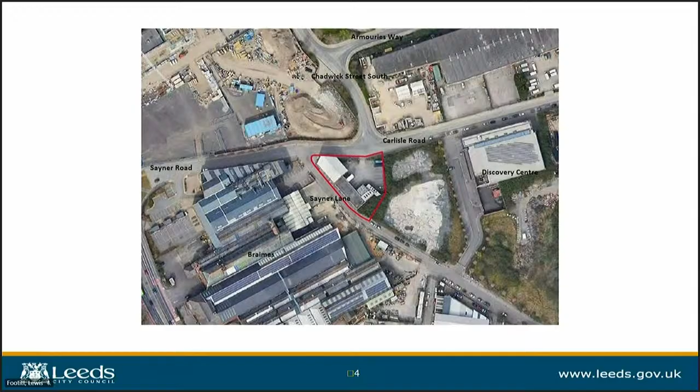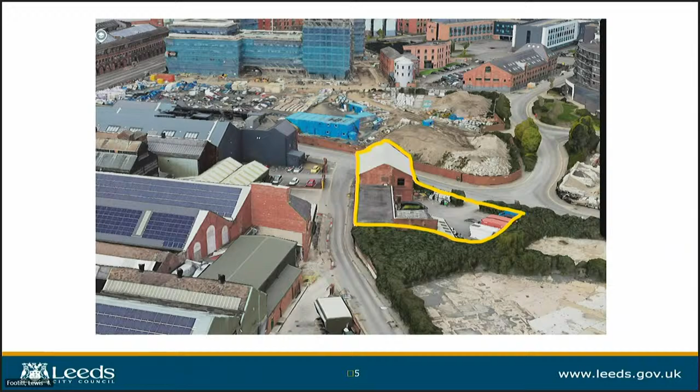And you can also see across Sayner Road there's the Points Cross development by the Guinness Trust. And immediately across Sayner Road, just here, there's permission for a 20-storey residential block. So the existing building comprises a 2-storey element at the apex of Sayner Lane and Carlisle Road.

And there's a single-storey element that's facing Sayner Lane, and there's a yard to the rear. I think you'll agree that the buildings are lacking in architectural merit and are unexceptional in visual terms.

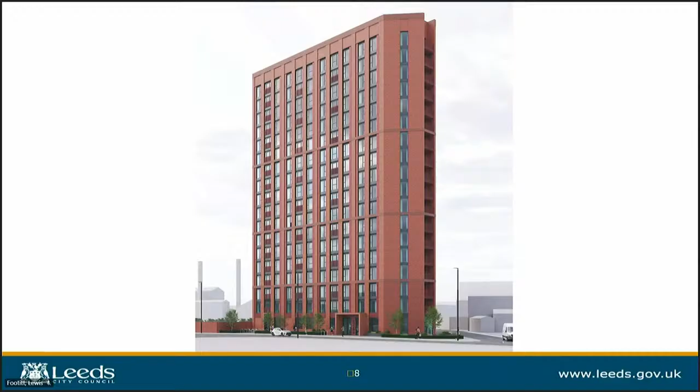So the proposal is to demolish all the buildings on site and erect an 18-storey building of 164 flats. The design team has worked with the developer to achieve a satisfactory facade. The building would be top and tailed with a distinctive crown and plinth.

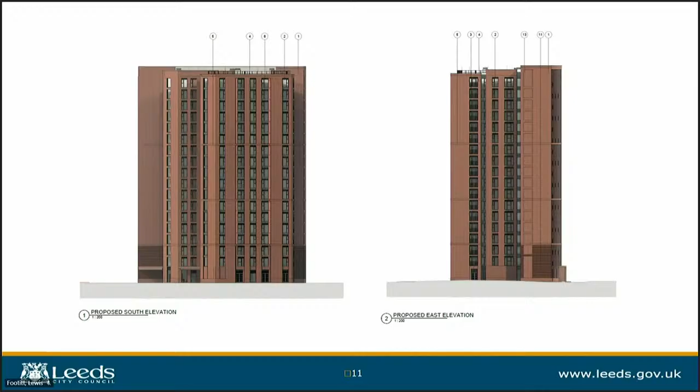The crown has these arched insets at the top there, and the plinth is defined with a different textured brick for the first 3 floors.

And the main part of the elevation has aligned windows, giving a strong vertical emphasis to the facade. And the windows would be set into deep 240mm reveals against the brick framing. And there'll be a variety of panelling and Juliet balconies to provide visual interest. On this slide, you can see the textured brickwork that helps define the plinth.

And this slide shows the south and east elevations. I'll just draw your attention to this bit of the building here, where there were going to be a line of windows, but they've been removed in case the site next door is developed in the future, so it wouldn't be at all stymied.

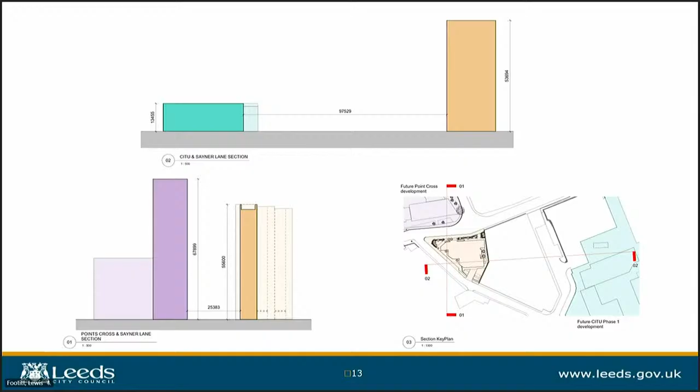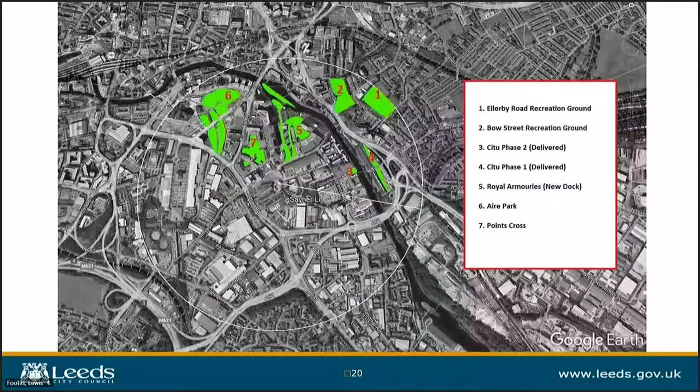In terms of biodiversity net gain, the planning application predated the go-live date for the national scheme, but nonetheless the scheme does demonstrate a 25% improvement in biodiversity. There isn't really very much biodiversity at all on the site at the moment, as it's mainly buildings and a tarmac yard.

In terms of wind mitigation, this includes the framing to the surround to the main entrance there. There's also landscaping here so people can't walk past the corner, and there's also a 1.8 metre fence that runs along the outside of the south and east of the site. And for design reasons, we had suggested a dwarf brick wall with a fence above, at least around the street frontage. But the developer has said that there are structural reasons why this cannot be done.

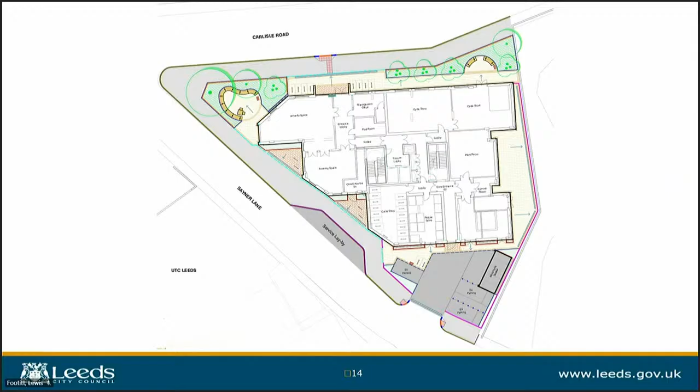In terms of accessible dwellings, there'll be 59 of the M4(2) type dwellings. That's 36%, and there would be 4 M4(3) dwellings, 2.4%. Both those percentages exceed the requirements in the policy.

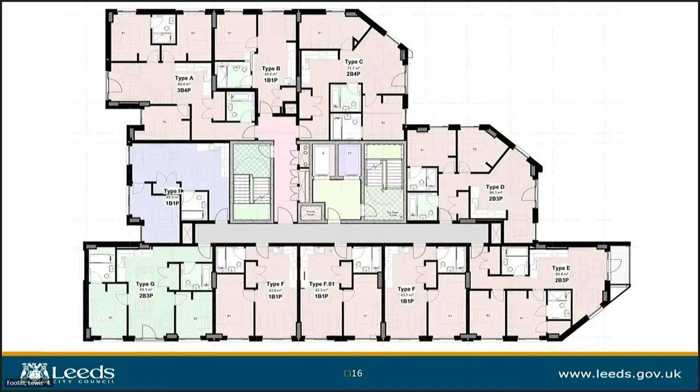So altogether, we feel that whilst the scheme doesn't provide affordable housing and doesn't provide the full green space financial contribution, it will regenerate a brownfield site and provide 164 new dwellings in a sustainable location. And also all the other policy requirements are met. So it's considered that the scheme should be supported. Thank you.

Okay, thank you. Can I now invite Ashley Wheat to the table, who is speaking in objection to the application, please? Okay, once you're ready, you will have 4 minutes to present your case. Whenever you're ready, yes. Thank you.

I appreciate some of the points I'm going to make have already been mentioned in the presentation, but I thought I'd raise them anyway. So I'm a resident, along with Jonathan, here on Central Place, which is, I think, the nearest neighbouring existing residential development, part of the Citu Climate Innovation District. I've got 4 main points to raise, really.

First being the parking. So the proposal outlays 3 parking spaces, including 2 accessible parking spaces. Living in the local area, I can tell you that parking is already a massive problem on street parking, and I do think it's unreasonable to assume that the occupiers of 164 dwellings aren't going to come with any cars. There's already a lot of pressure.

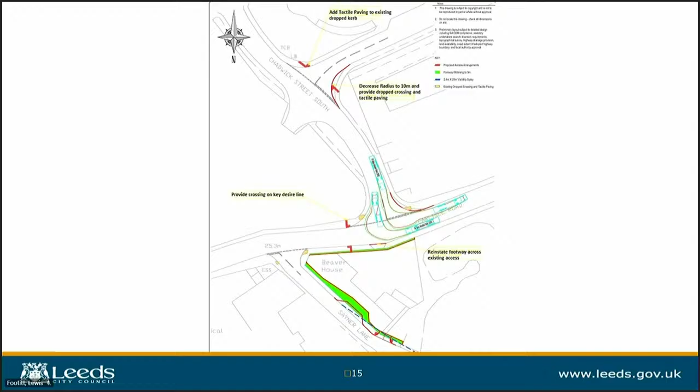So, Councillor Khan, the drop-off and pick-up. So there is a lay-by that they're proposing on Sayner Lane, which would be usable for drop-off and pick-up. So this is the new lay-by. I know the main entrance is round here, but I believe there is the ability to enter in this area as well. The other side of this is that at the moment, the area in front of here is double yellow lines, but you can drop off and pick up on double yellow lines if required, so there is the potential for taxi pick-up and drop-off to occur here as well. But there is a particular lay-by that will be available for people.

Just whilst Robin's looking for the GPs. Yeah, sorry, Gillian. Are we encouraging people to park on double yellow lines to drop off and pick up, please? When we've got a TRO to restrict people parking on the double yellow line. No, clearly not to park, but in terms of pick-up, it is allowed on double yellow lines. In certain circumstances, you can have no stopping at all on double yellows. Yeah, that isn't in this area at the moment. So when we were out on site this morning, there was a vehicle parked there with a blue badge, for example, because that is acceptable on that grade of double yellow line. So that's the position that we've got there at the moment. Yeah.

So the GP surgeries, the closest one is the York Street Health Practice, which is 0.6 miles from the site. And you have Shakespeare Medical Practice, a mile, and the Light, which is also a mile. Councillor Carr, I can see they're in your ward, so I'm guessing you want to come back. I have got you, Councillor Blackburn. Chair, just briefly on the Shakespeare surgery. I know they're accepting new patients, but that surgery is not fit for purpose, actually, so how can we encourage and signpost residents from this development to go onto that surgery?

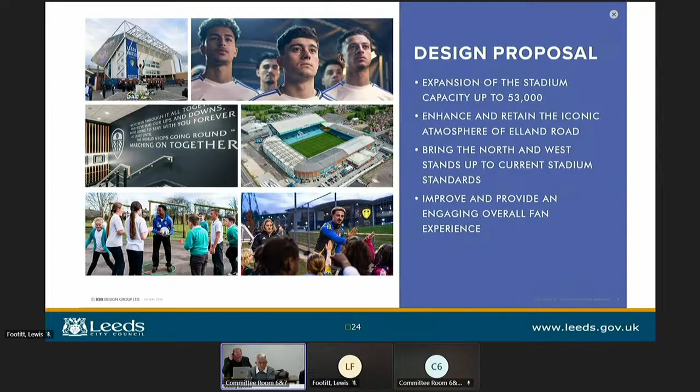So the stadium dates back to 1905, and pretty much all the stands have been expanded or redeveloped or enhanced to one degree or another over this period of time. And the last significant change was the construction of the new East Stand and the all-seater status some 33 years ago. So clearly much has moved on in terms of new stadiums in that time, and now's the time to look at this.

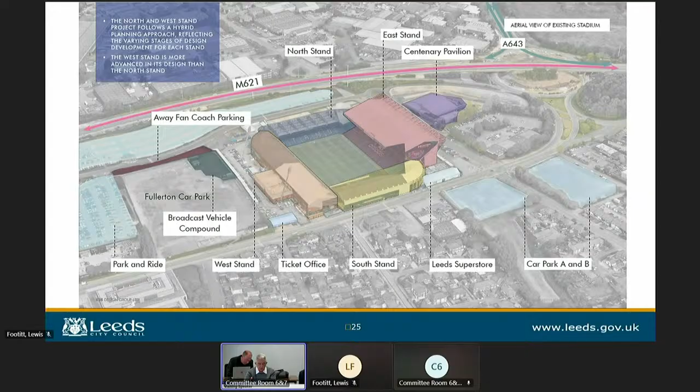So the club is considering detailed plans to enhance and expand the stadium, and looking to submit a hybrid planning application later in the summer. The West Stand will be in detail, North Stand in outline, and this will take the capacity from 37,645 to a licensed capacity of circa 53,000.

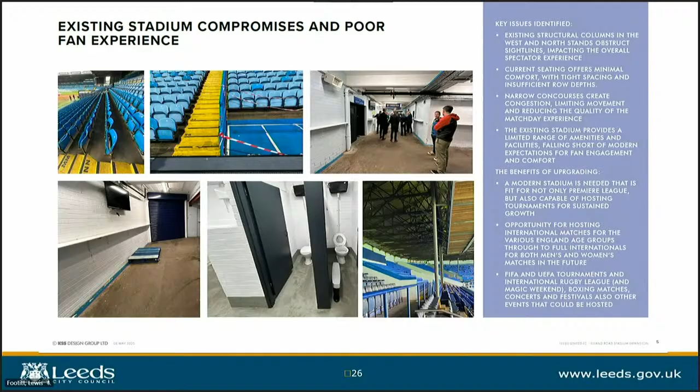Move on, please. So the one thing that really separates Elland Road, and you will have seen that over recent weeks, is the very special match day atmosphere. It's renowned throughout the world of football. It's comparable with any other English or European stadium. And with any proposals moving forward, as a sports architect, the one thing that we're always looking to do is make sure all we do is enhance that amazing atmosphere and the match day experience.

Despite this amazing atmosphere, the current overall match day experience for most fans doesn't compare well with other modern English stadiums. Concourses are tight and crowded, facilities are limited and dated, and some of the seating standards offer minimal comfort levels. And the views for many of the fans are impacted by structural columns to the north and west stands.

This lack of modern facilities inevitably results in fans arriving a bit later and leaving earlier than at other equivalent modern stadiums. And this compounds pre and post match congestion and diminishes the overall match day experience. So we really want to do something about that.

The owners have made it very clear that they want to provide the supporters with a modern, sustainable stadium that will enable them to compete with the other leading English clubs over the longer term, and that really is the basis of much that's happening within football at the moment.

This is a stadium that's fit for the Premier League, and luckily we're in a position now that we can make that statement. It meets a significant demand for additional match day and seasonal tickets. And it is capable of hosting a whole range of FIFA and UEFA international tournaments, as well as International Rugby League, concerts, boxing matches, festivals, all the things that Elland Road have hosted over the years.

Being able to do this assists them in meeting and maintaining the financial sustainability standards that are now established by the Premier League and UEFA, and you've read much about that, I'm sure, over the last year or so. That's really essential for the long-term viability and success of the club, and this project is vital in meeting these requirements.

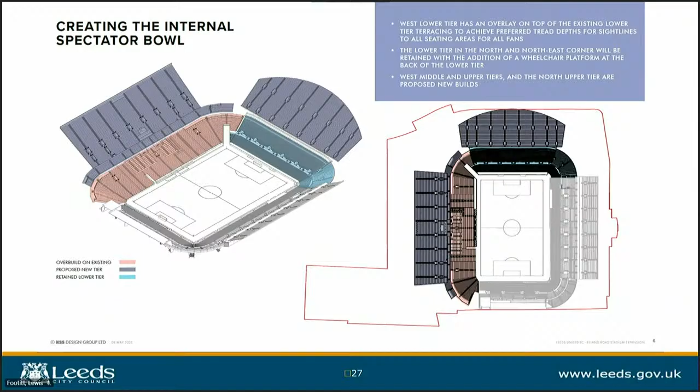This just shows the sections and the east stand on the right as I'm looking at it, and the proposed west and north stand. So you can see the scale of the proposals. It's a significant development. Next, please.

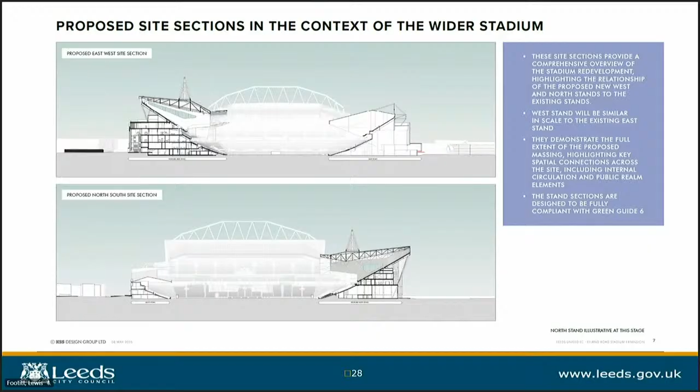So the new west stand extends to the west, to the rear of the existing stand, into the adjacent Fullerton car park and the outside broadcast area. You can see on this the red profile is the existing stand. So there's no getting away from the fact that this is a very significant proposal. It will take the seating capacity of the west stand from circa 8,000 at the moment to 17,750.

And it will provide a broad range of high quality facilities and amenities for both match days and non-match days, significantly enhancing the quality of what's there, both in terms of the internal spaces and the overall visitor experience.

The west stand also, by tradition, includes all of the back of house facilities, so we'll be including new high quality players, officials, media facilities, production kitchens, all the things you need to service this, and particularly media facilities that need to meet the standards set by UEFA, the Premier League, and the various broadcast and media partners, and not the least of the requirements is that we are fully compliant with Green Guide 6.

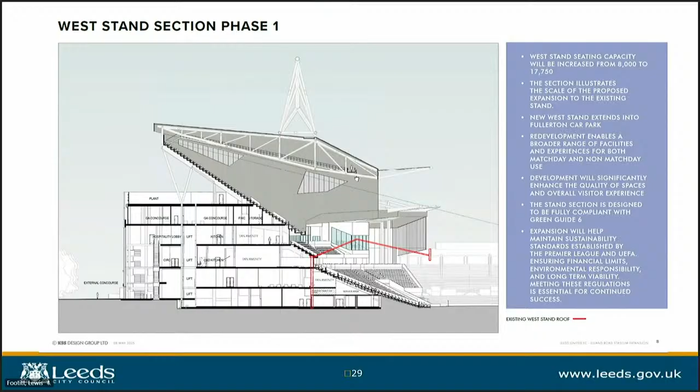So the north stand, intending to increase that capacity from 10,400 to about 15,300, expanding to the north behind the existing stand to provide a continuous home end of general admission seats throughout the entire tier. We will be putting additional wheelchair spectator platforms and facilities for those fans in the middle of that tier.

This new, for want of a better phrase, Kop stand will include all the spectator facilities, have wonderful views back to the city, and will also include a new internal fan zone at ground level accessible from Bobby Collins Way.

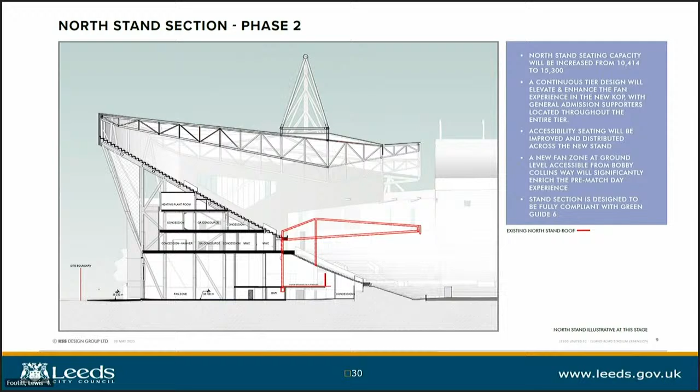So the new stand will include a new middle tier and upper tier with a full range of high quality spectator amenities across the 5 floors.

Fans will have phenomenal views of not only what's going on the pitch, but also to the west of the city from the building itself. The roof geometry of both the west and north stand is designed to acoustically focus the crowd noise back onto the pitch to give that competitive advantage and to enhance the overall stadium match day experience.

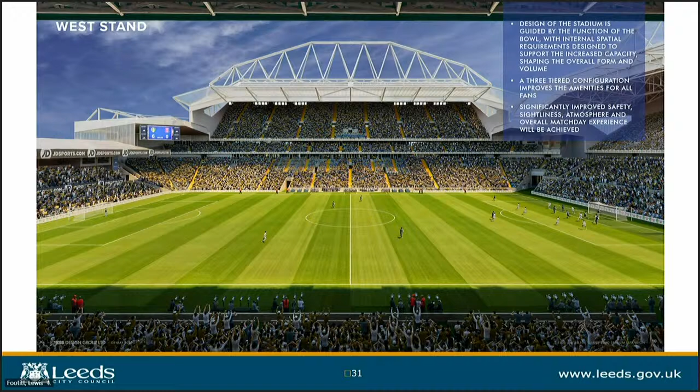The external form of a stadium is always guided by the function of what happens within the stadium bowl, all the various supporting facilities that we need, and not least the demands of access and egress arrangements, safe access and egress arrangements for very large numbers of spectators.

So you can see here the CGIs of what's proposed. The external facades and walkways are all designed to work within the existing site levels, and for those that know the site, it drops quite significantly across the width of the site, and also integrates into the emerging master plan. The surrounding landscape also introduces new public realm and green spaces for community use, which also supports the match day operations.

Just going on to how we can build this onto the next phase. I don't intend to go through this in detail, but we have considerable experience as a team of expanding existing stadiums whilst they remain in operation, and there are some significant challenges of doing that whilst we retain safe spectator access and egress. So I'm not intending to go through the slides here in great detail.

Happy to take questions, but we've considered the overall phasing of the construction of the plans to do 2 things really. One, to ensure that we can have continuity of stadium operations with minimal disruptions, and more importantly, to maintain the continuity of safety licensing whilst efficiently constructing both stands. We've done this in a number of stadiums, and there is an art form involved in that.

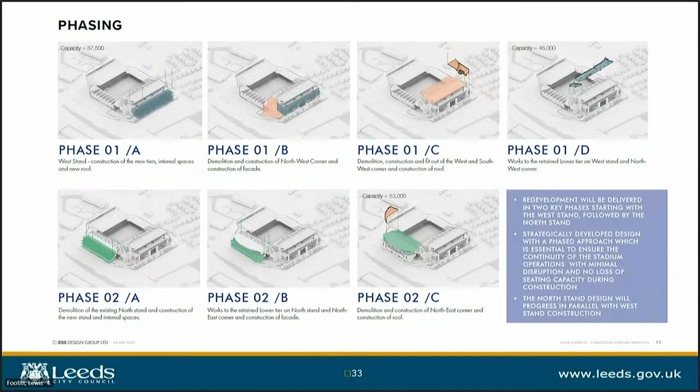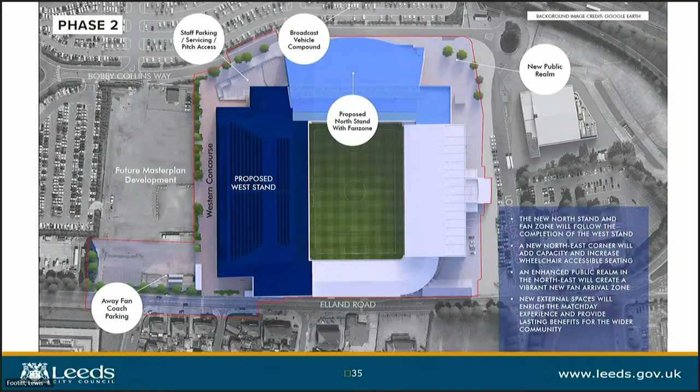So the image shows the completed development and has some new public realm in there. Just moving on quickly, please.

At the heart of this project is a desire to significantly enhance the match day experience and the atmosphere for every fan. There's a diverse range of spaces, amenities, and experiences available to the clubs. They will be designed to be uniquely Leeds United, embracing the club's rich history and their brand.

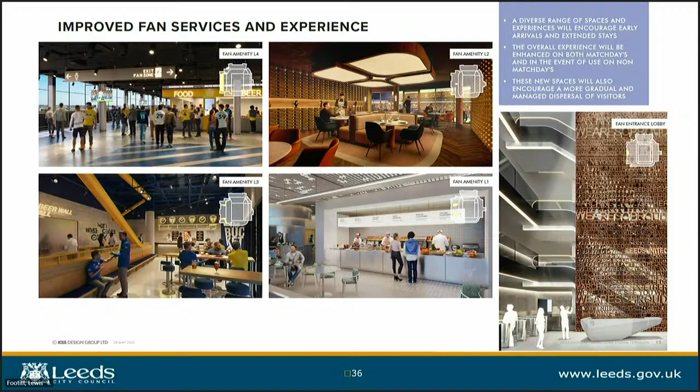Experience that we have on many other projects shows that providing these facilities will encourage positive behavioural change, particularly established spectator behaviour, encouraging them to arrive much earlier and to stay longer, which in itself reduces congestion and improves the overall match day experience. Just my last slide, and I'll quickly go through this.

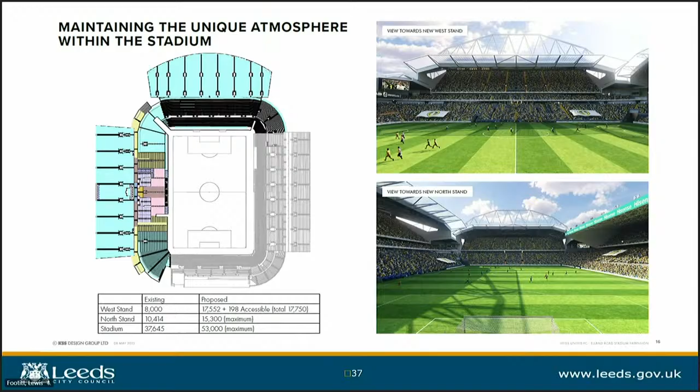So we've worked very collaboratively and constructively with the city planning officers during the whole of the pre-app process, developing various design concepts and particularly looking at external material selection. Design of the stand reflects the key elements of the existing east stand.

The iconic white exoskeleton, the dynamic expression of roof and facades that you can see, seamlessly blends, I think, the timeless tradition of a 4-stand stadium with this modern, sophisticated aesthetic. The external materials have been selected to reflect the club's identity. The colour palette and finishes are sympathetic to the existing building and perhaps the wider Leeds civic architecture. I would argue and state confidently that the stadium we've designed is understated and elegant, with a touch of contemporary charm.

It has a civic scale. It's a large building. It stands very confidently at a key gateway to the city. It's bold and respectful. It's designed to become a centrepiece of the expanded Elland Road neighbourhood and a key piece of the wider regeneration strategy for the South Leeds corridor. It's a bold statement. It'll act as a catalyst, I'm sure, for future regeneration.

It's future facing. It's passionate and it's bold and it's unmistakably Leeds. Thank you.

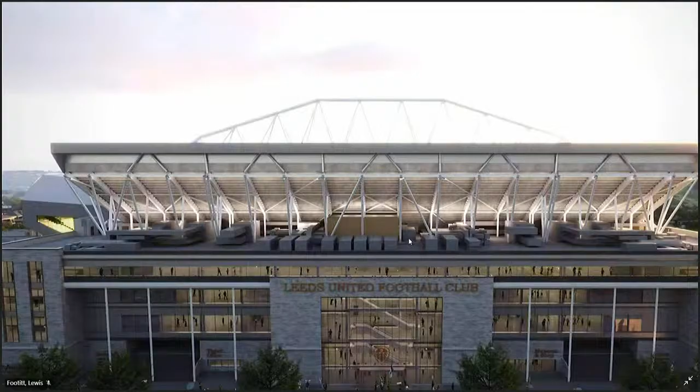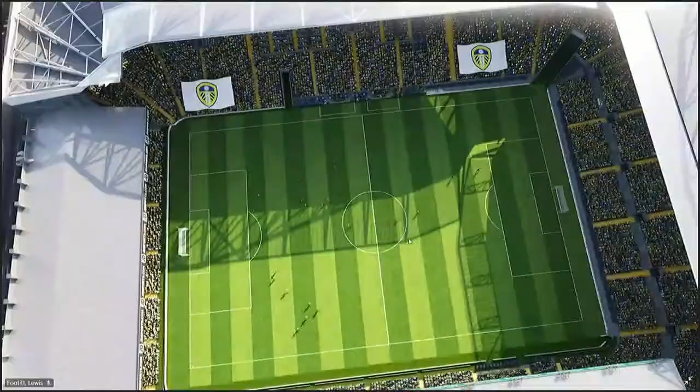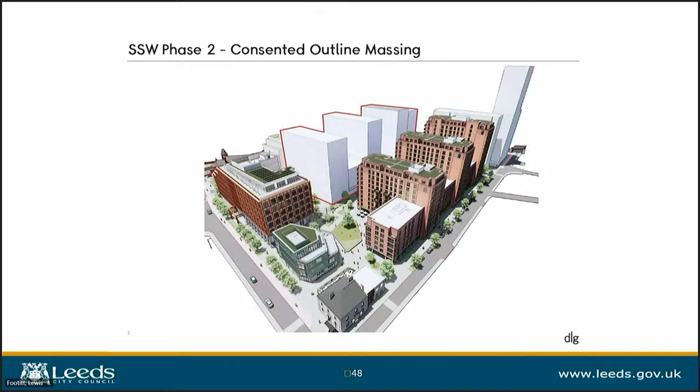We'd like to talk about the plots in the centre of the site, outlined in red here. The detailed consent is now well under construction. The first residential building, Resi 1, is due to complete January 2027. This will provide 451 homes alongside key areas of public realm, including the public square in the northeast of the site, two large planted courtyards, and significant improvements to Sweet Street West.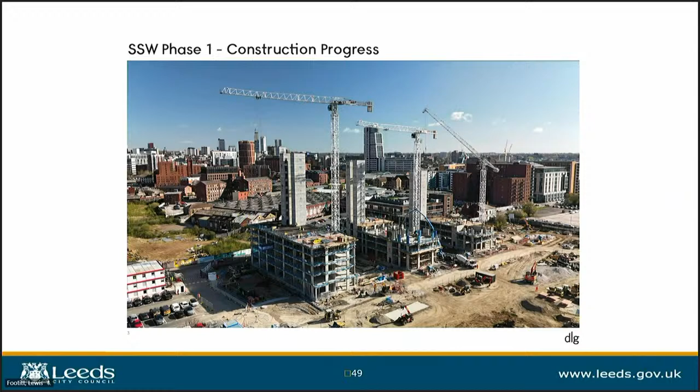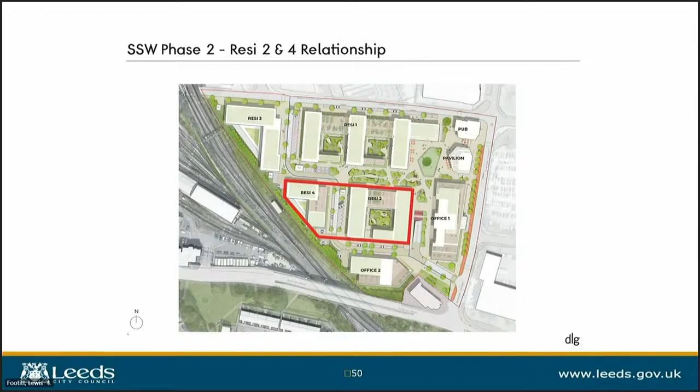The plots for Resi 2 and 4 are highlighted in red here on the plan, and we're presenting today developments for this phase of the site. The outline building footprints shown here are similar to those for Resi 1. We believe there is an opportunity to improve the composition and setting of these buildings, working hand in hand with public realm enhancements.

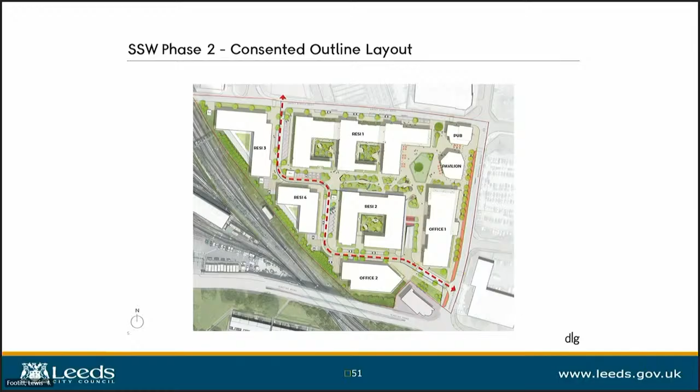One of the main drivers when developing the central plots is reappraising the route of the access road. Currently the road bisects the site in two, limiting the quality of the public realm to the west portion of the site. The road is the dominant feature here, with the public open space subservient to it and its associated parking. We are therefore proposing to reroute the access road towards the perimeter, reduce its prominence, and open up a much greater expanse of pedestrianised public realm.

Reorientation and reproportioning of the building allows us to improve the sequence of spaces running through the site and provide a more distinct address for each block. The forms of the blocks in plan allow for a much greater number of dual aspect apartments to be delivered in this phase.

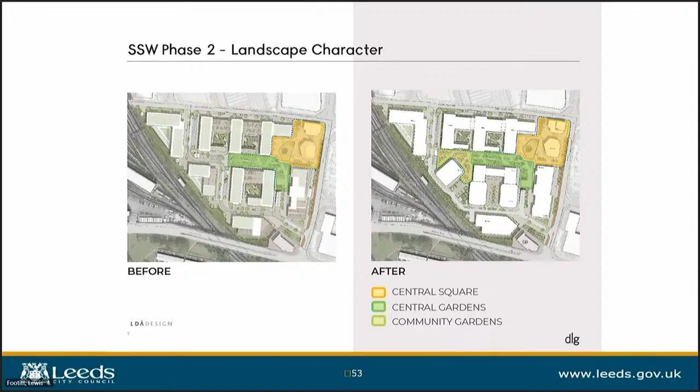Here's a before and after comparison of the landscape characters, showing how the east-west central green space is now a more substantial, less disjointed piece of public realm. The names are just placeholders at the moment, but these will be worked up in more detail by LDA, who will develop a distinct character for each of these spaces. In terms of numbers, this gives a central green space improvement of 25% in area, an increase in new trees of 31 across the site, and an overall public space improvement of 4%. So we not only have an improvement in the amount of public realm delivered, we feel there are significant improvements to the quality of these spaces and also the setting of the buildings.

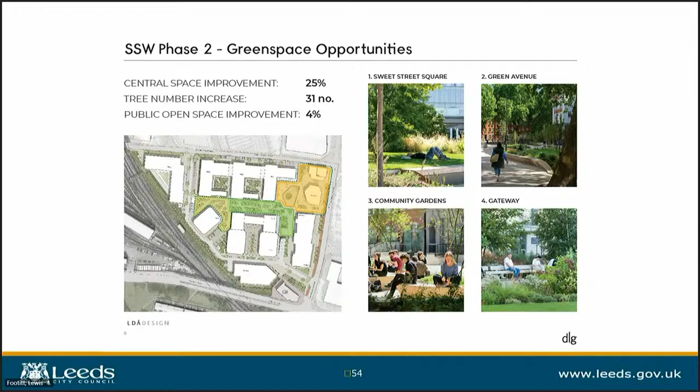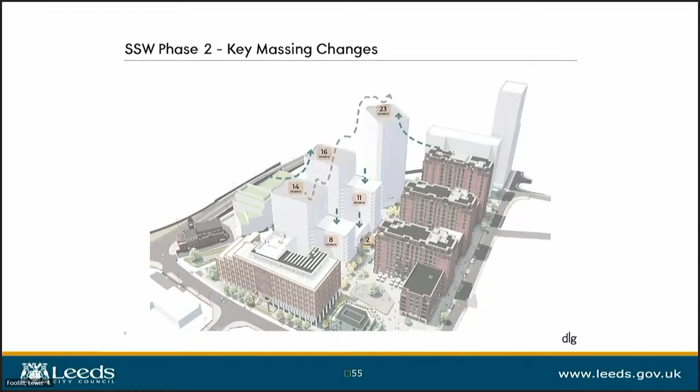Moving on to massing changes, we are proposing to drop height towards the centre of the site on Resi 2 to allow far more light into the public realm. We're proposing a significant reduction in height versus the outline, reducing from 14 to 8 storeys on the northeast corner of Resi 2. The linking buildings on Resi 2 drop from 7 storeys at outline to 2 in the current proposals. To maintain the quantum of development, Resi 4 is now a point block at 23 storeys, which you can see at the rear against the railway line. We think this scale suits its location, reinforcing a progression in height up to the southwest corner and bookending the central green space to provide a more positive and distinct skyline.

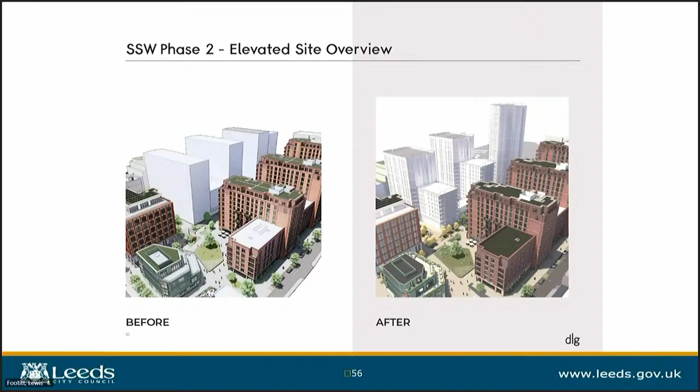This before and after comparison of the proposed massing shows how we moved away from the regimented arrangement of parallel blocks to a massing that better reflects its position on the site, dropping in scale to the north and pushing the point blocks to the south. The point block of Resi 4 forms a stronger relationship with the railway line to the southwest.

This is a raised perspective looking west from the east, and here you can see the extension of the public realm, the dropping of the massing of BTR2, and the distinct form of BTR4 in the background as a bookend.

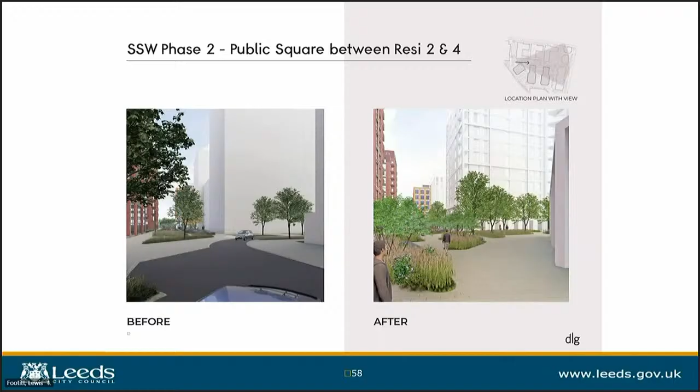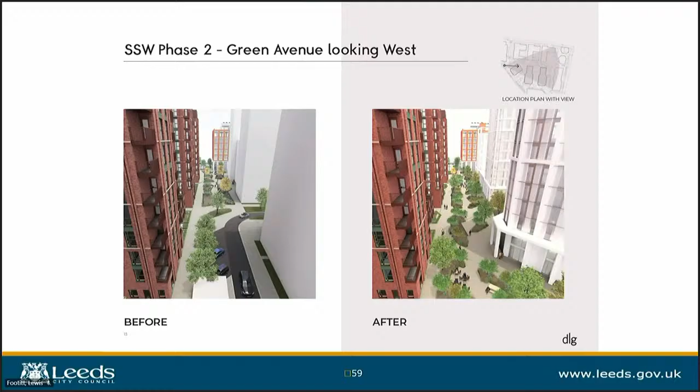Here's an eye-level view. I think this view speaks for itself, really. It's a complete transformation of the space at this level outside Resi 4, from a car-dominated section to a completely pedestrianised and green extension of the public realm. Again, this is a raised view from the same position. Again, I think the benefits are obvious. The quality of public realm is transformed, providing a much improved setting for the entrances of the buildings.

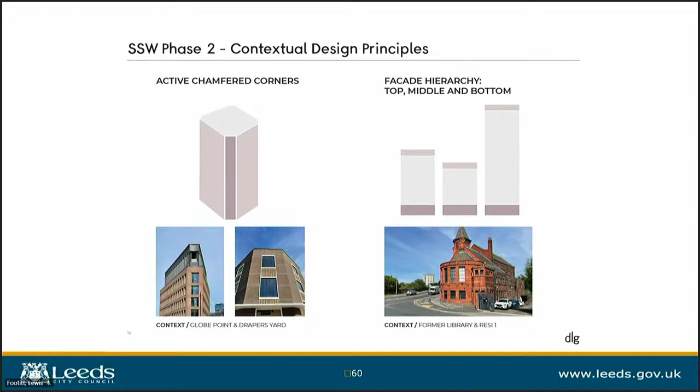In terms of design principles, we're looking to maintain those that were established as part of the original consent. So taking cues from local architecture, such as the active chamfer corners, examples would be Globe Point and Draper's Yard. Make sure the buildings have a clear hierarchy of bottom, middle and crown, such as those of the former Holbeck Library.

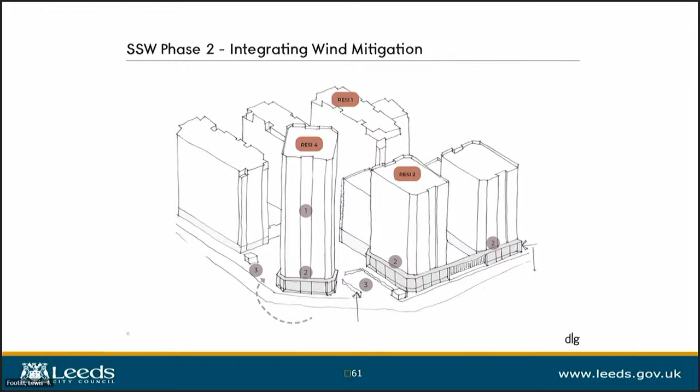One thing to say, we're also working closely with wind engineers on this scheme because it's quite a difficult site in terms of wind engineering, because it's got no shelter from the prevailing wind to the southwest. But we are looking to provide compliance in the building forms themselves rather than rely on extensive wind mitigation at ground. So we're looking at wind mitigation as inherent to the architecture, using devices such as canopies and colonnades, rather than wind mitigation as objects appended to the buildings and landscape.

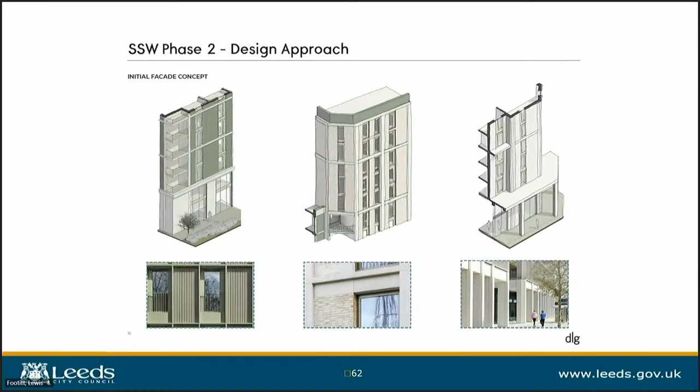In terms of facade treatment, I think the headline here is that we'd like to move away from a red brick for these plots. Resi 1 utilises two tones of red brick, and we feel a counterpoint is required to give variety across the site because it's a very large site. Shared architectural language across buildings is still important though. So devices such as pairing of windows, introducing feature banding on alternate floors to give the buildings a larger language and rhythm, matching the design approach of Resi 1. The buildings will still be majority brick, but in a much lighter tone. And then colonnades in stone form a base of the Resi 1 building that's under construction, and we'd like to continue this language for Resi 2 and 4.

So you can see here, sorry, I've lost my way here. Sorry, green. So yeah, green is an accent colour that we've used on Resi 1 for the windows, and it's quite hard to tell on this visual, but on the right of the image you can see we have some glazed geometric tiling that pairs windows together. That's under construction at the moment, and we'd like to take that green language as a recurring motif throughout the project. The original reference for this came from thinking about the construction of the former Holbeck Library and the glazed terracotta we found, which was produced by Burmantofts Pottery. And the green is a nod to a popular colour used within their architectural faience. A good example would be the County Arcade that has a lovely green and orange faience throughout at high level.

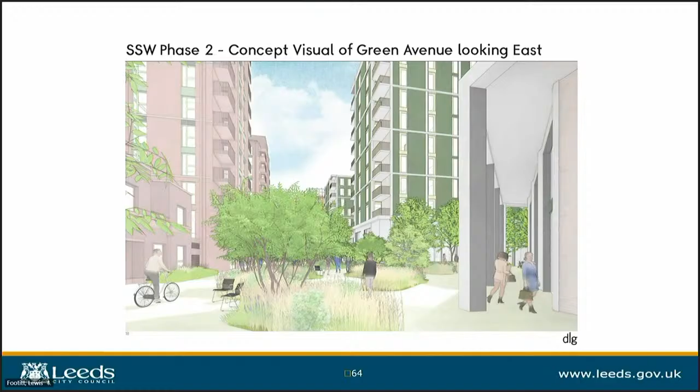And then the last image, again, this is across the central green space, and this is looking east this time. So you can see on the right the architecture. The idea is to share a lot of the same architectural features as Resi 1, but in a different material aesthetic. It does the same things in terms of the architectural language, such as pairing windows, banding on alternate courses, stacked corner balconies for dual aspect apartments. And again, the idea is of the colonnade running through, so they'll run through grounds across the development. And I think I'm done. Thank you.

Okay, right. Yeah, I was very engrossed in that. I was waiting for more photos, more pictures.

Right. Any questions from panel members to the applicants? No? Oh, right. Councillor Dye. Thank you. I was just looking on the site plan and... Should I go back to it? Yeah, if you go back to the, I think it's probably one of the first.

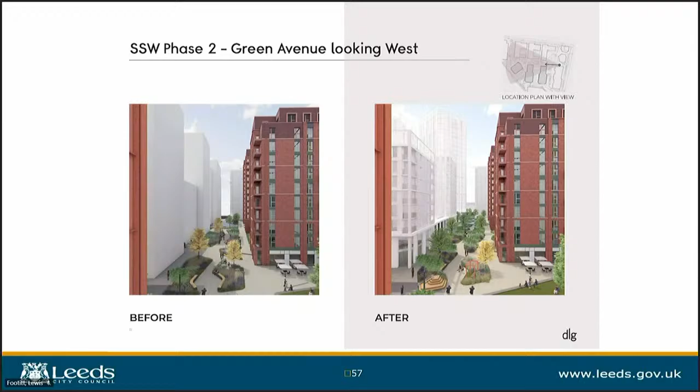Yeah, that one. So am I right in thinking the lines that are shown on the top of B are access points where people can walk through from the streets? Correct. Yeah. So the Resi 1 block looks like it's an enormous block there, but there are actually access routes through. There's two kind of two-story walkthroughs there that take you into those two courtyards that you can see, and then through further into the centre of the site. Yeah. So there is more permeability there than it appears.

Yeah. And can you then not walk all the way through Resi 2? What happens when you get there? No, you're met with an entrance there, and then there's a rear courtyard for Resi 2, but that would be a private courtyard just for that block. So the only people who can get into that courtyard for parking are the residents of Resi 2? That, as it's currently designed, yes. Right, okay. And I was just wondering about whether there's any scope for moving that parking. I think the additional green space is really nice, but that somehow just seems to be an incongruous block of parking.

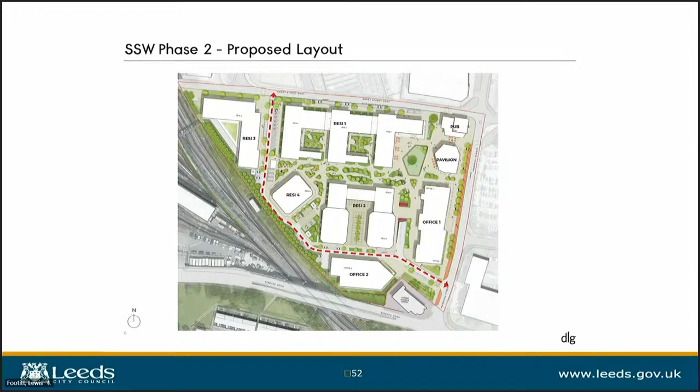We will move on to the set of questions then. Page 172 of your agenda, please. So I'll go through the three questions and ask whether you're in agreement or not. Number one, do members have any comments on the proposed realignment of the internal road? Yes, Councillor Dye. I would say it's definitely an improvement in the fact that it does what you said at the beginning, that it doesn't cut the site in half and it allows for more green space. So I'm definitely in favour of that. Okay, thank you. I see nods around the table. Everyone seems to be in agreement.

So number two, do members have any comments on the changes to residential blocks Resi 2 and Resi 4? No? Everyone's okay with that? Thank you. And number three, do members have any comments on the overall changes to the development? No. Everyone's in agreement, happy with that. Okay, right. Thank you. And thank you for coming with your presentation. I was absolutely engrossed in your slides. I love that last one, how it's going to look when it's finished. That was amazing. Oh, it's gone. I was going to have another look at it. That one, that looks fabulous. Really impressed. Thank you for coming in with your presentation.